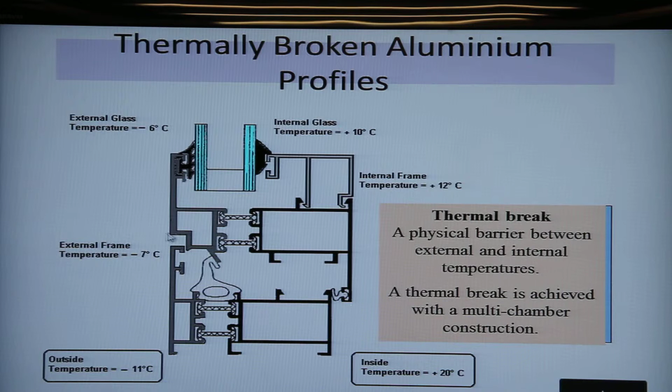That's how a thermally broken aluminium profile looks, and this is one half of the profile here, and this is the other half of the profile, and this in between is the polyamide strip. The process of thermally breaking aluminium has 4 steps. We get thermal break lines from Müller Technologies of Switzerland, and for all the 4 steps, there are machines associated with this. The first process is knurling.

We have profiles broken into 2 parts or split into 2. Profiles get extruded in that way. The 2 halves of the profile where they are to be joined have to be knurled, because otherwise when we insert the polyamide strip into the recess which is made for the polyamide strip, it keeps slipping. By knurling, we introduce very small serrations on the walls of the aluminium profile. So when you insert the strip, it gives more friction, and therefore the holding of the polyamide strip within the profile is better.

The next step is assembling. Assembling means putting the polyamide strip into the recesses meant for the polyamide strip in the profiles. And then the third process is rolling, which means that the polyimide strips are rolled in such a way that the ends get crimped.

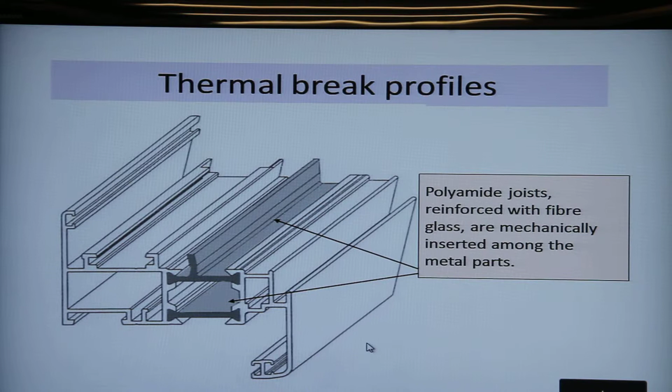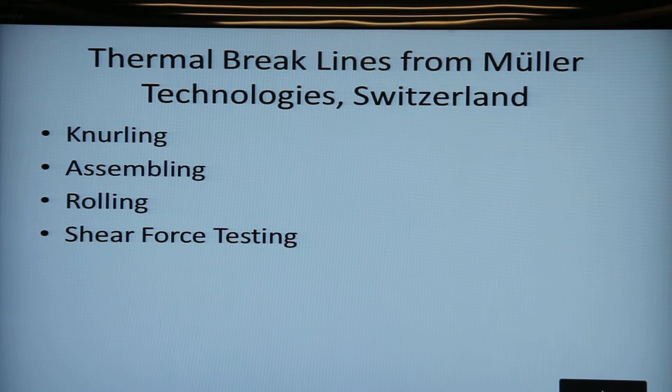And finally, we have shear force testing, in which the aluminium profiles that are inserted with the polyamide strip and rolled, we give a pressure, a longitudinal pressure and a transverse pressure, to check how much force is required for breaking that. It's just a check. Now let's take a look at the video of

a thermal break line. Now, Müller Technologies are suppliers of thermal break lines to the largest extruder of aluminium profiles in the world, and that is Sapa. And this video has been taken in the Sapa factory.

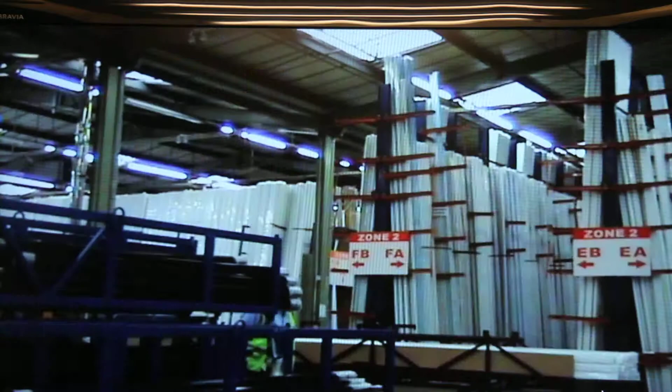That's the storage area for the profiles, and that's the thermal break line. As you see over here, the various machines are placed here, and all this is material handling equipment on the sides, and let's see how the process happens now.

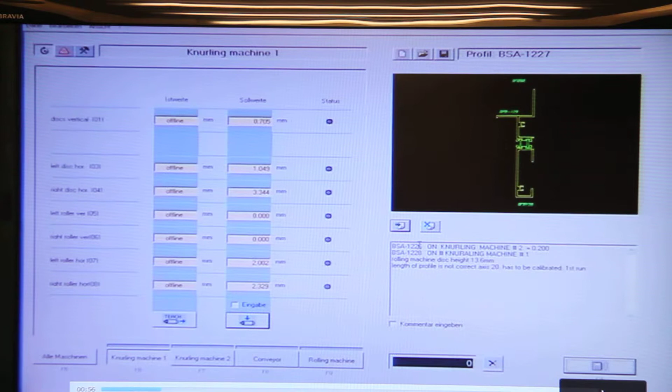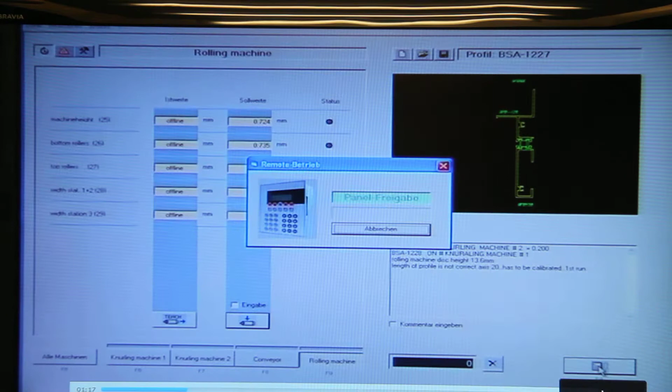The video shows the thermally broken aluminum profile for a casement frame being made. This is a computerized system. Of course, lower systems are also available. Here, all the profile characteristics are fed into the computer, and when you feed the data into the computer, the computer adjusts the machines so that that particular profile can be

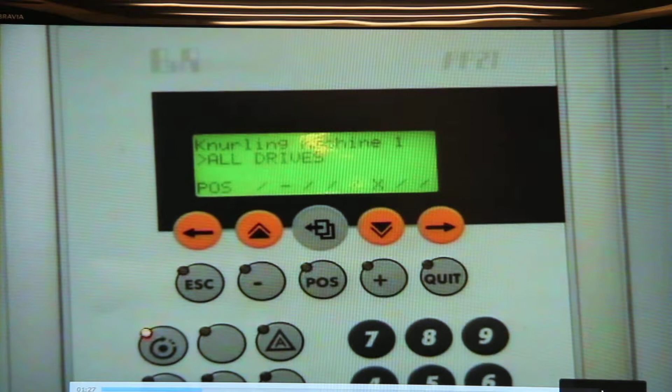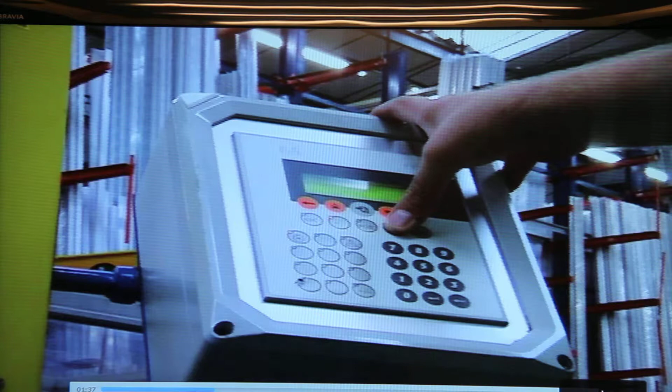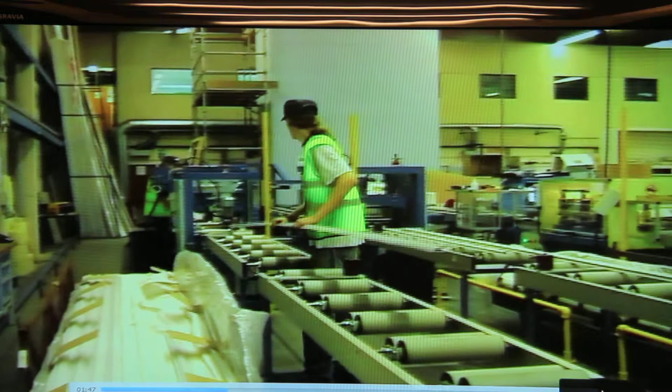processed. Now here is the knurling machine being adjusted for this particular profile. That's the adjustment happening. It is just the kind of distance between the rollers that is adjusted. That is one half of the profile being processed now.

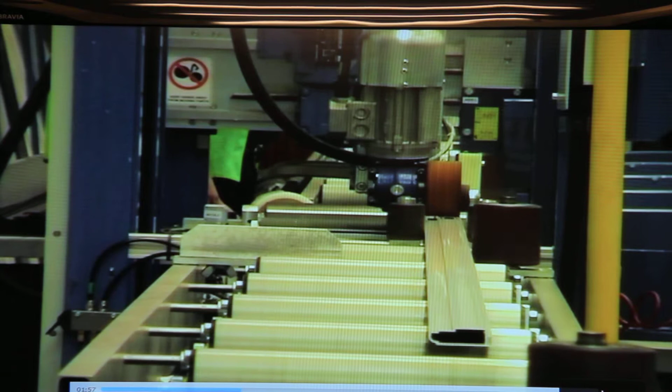Yes, now here if you look carefully, masking tape is being put on the profile so that the surface of the profile does not get damaged while it is being processed. This is an accessory, but the main thermal break line consists of a knurling machine, an assembly machine and a rolling machine, and of course shear force testing. But there are such accessories available which can be added as per the customer's requirement.

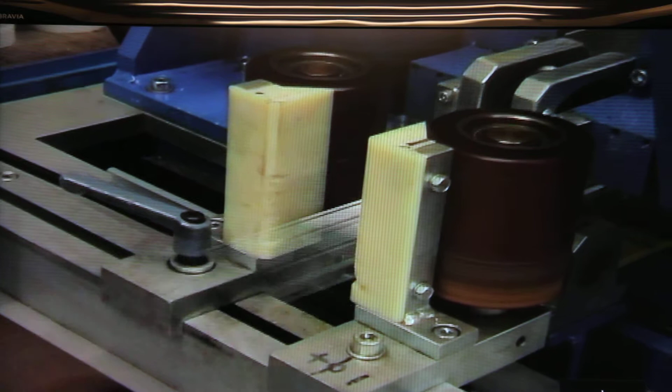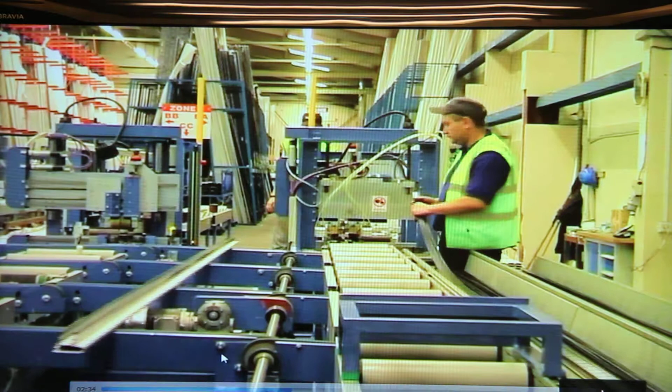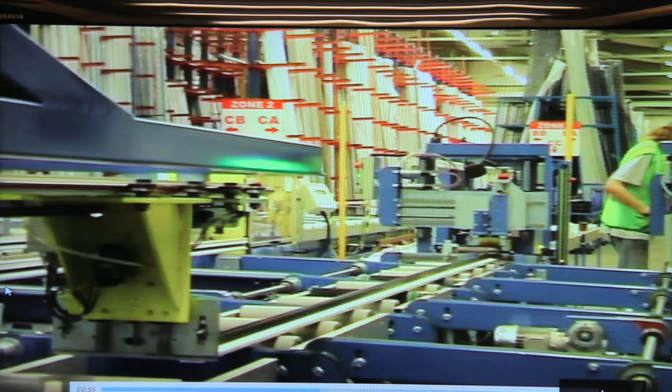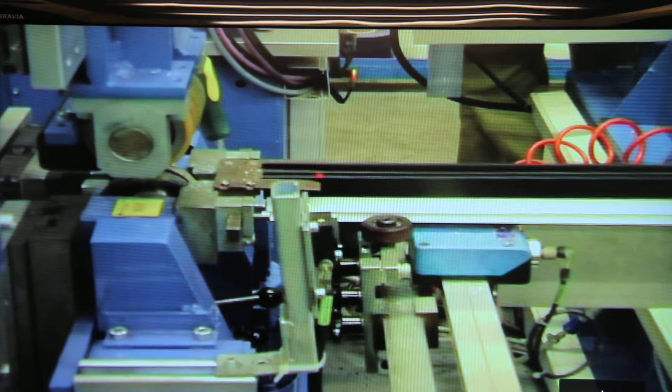That is the strip being added from the other side, and now the polyamide strips will be assembled to the profile. You see, one half of the profile is now carrying the polyamide strip. It goes to the next station and the strip is straightened, and now the other half of the profile, as you see, has been assembled.

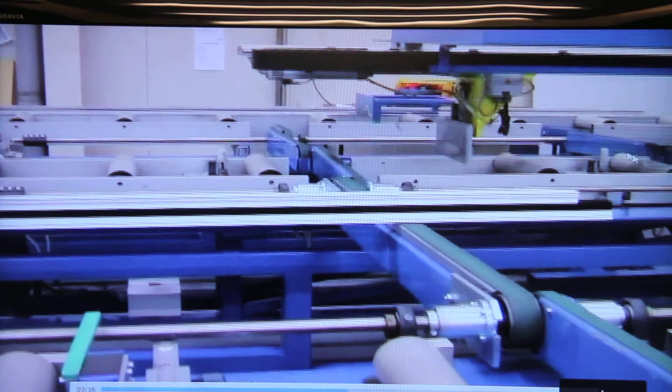Now this area will be straightened so that it is at 90 degree or perpendicular. That's the straightening happening on the right, and now it goes into rolling. If you look carefully, you will see the L shape, and this is the casement frame.

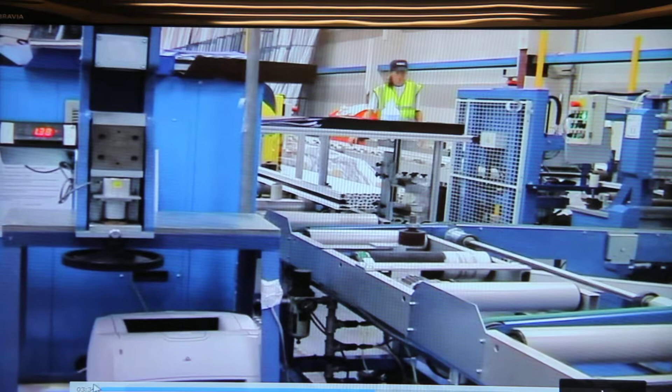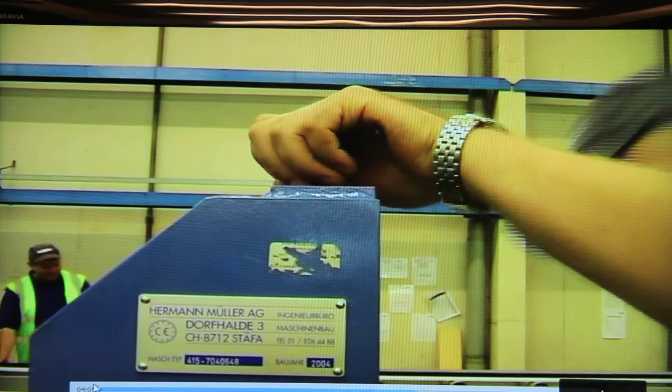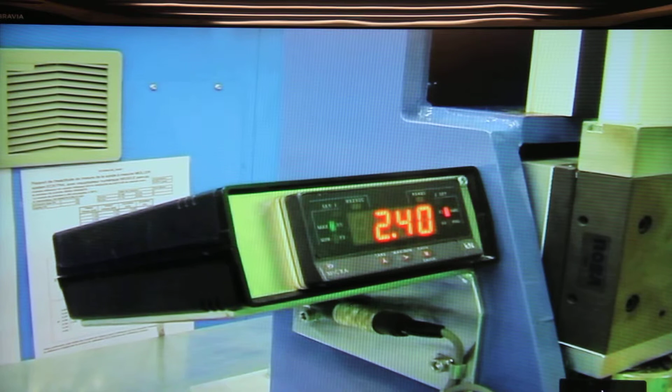Now the rolling happens and the edges get crimped so that the polyamide gets gripped properly in the recess. This is the longitudinal shear test going on. This meter shows the force at which the strip gets taken out or the profile breaks.

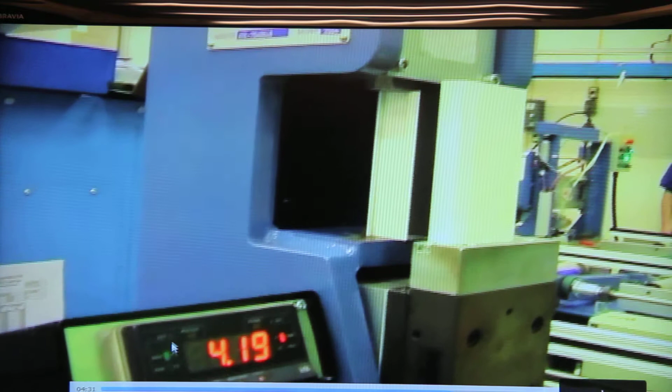Now you see here, this is the polyamide strip, this is one half and the other half of the profile, and now it started breaking. And this records the point, the shear force at which the profile finally gave way.

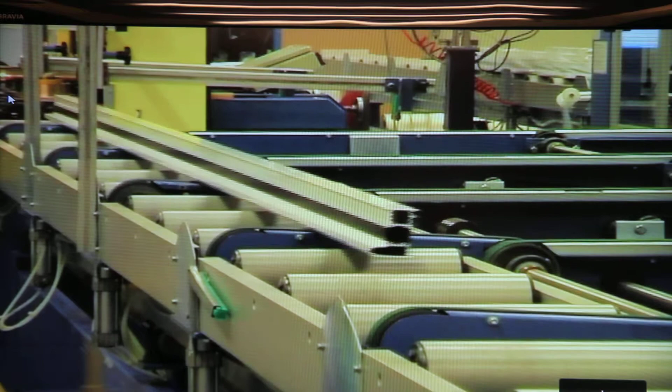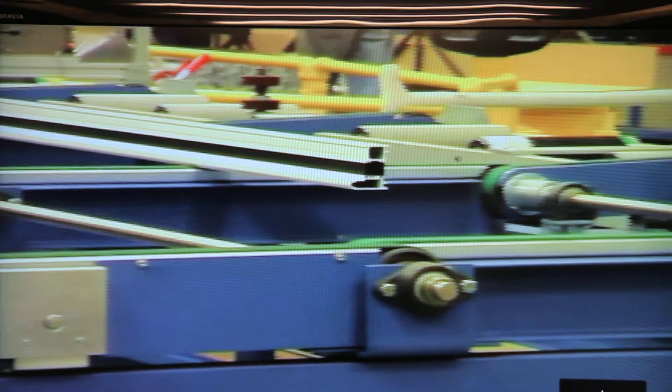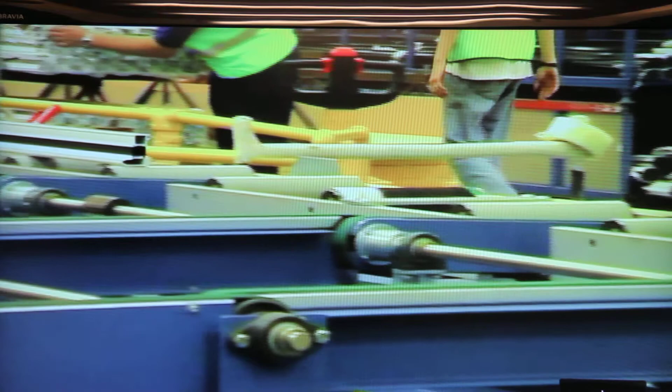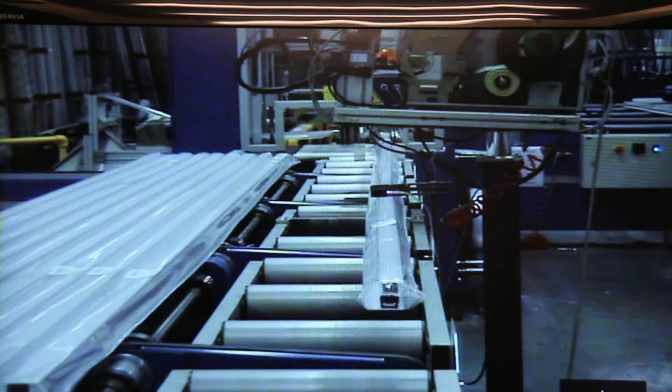Now the process is complete and it's going for packing and then eventual stacking in the finished goods area. That's the profile, it's packed, and it will now go to the stacking area.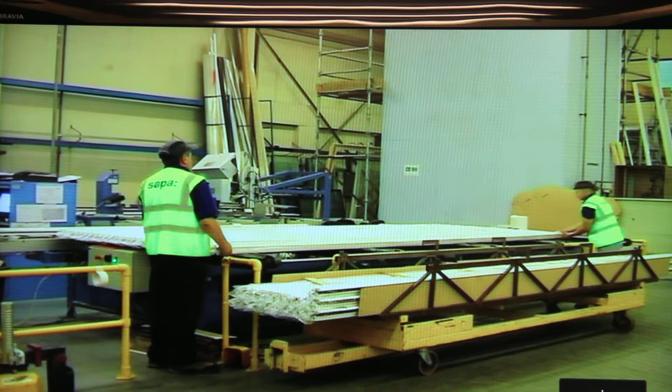Systems are designed depending on the amount of manual intervention desired. Let's have a look at some of the machines that we use. The one that you see on your left is the type S, when you need lower production rates of about 20 profiles per hour. This is the knurling machine. The LK1 is for production rates of up to 60 profiles per hour, and the LK1+2 with axis control, production rate 100 to 150 profiles per hour.

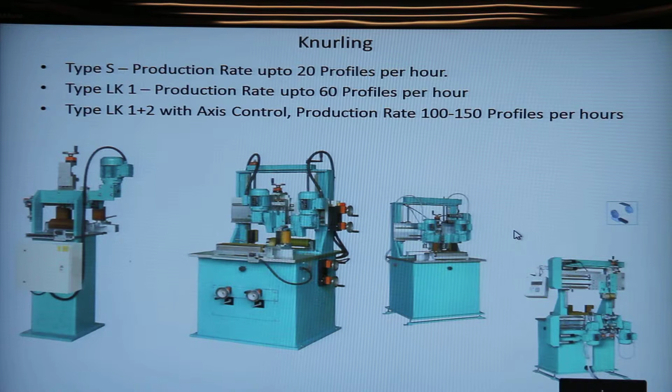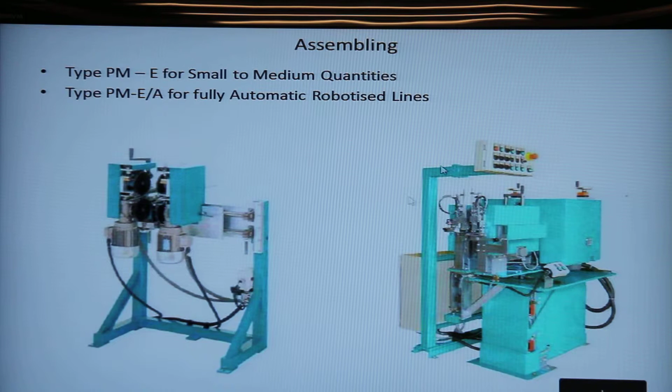For assembling, these are the two types of machines, type PM-E for small to medium quantities and type PM-E/A for fully automatic and robotized line. That's the fully automatic line, and that's the low production machine.

The traditional way is combined knurling and assembling system. The classic assembly way is knurling is separate and then assembly happens. But they have come up with a new system, which is the combined knurling assembling, in which knurling as well as assembly happens simultaneously. So this increases the production rate.